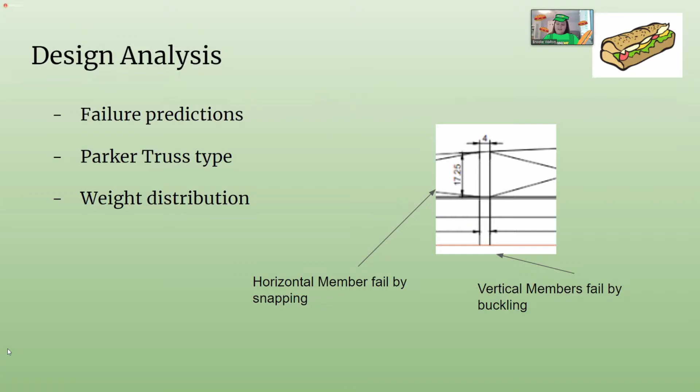After those calculations were completed, we found that the downwards forces were about 2.6 times larger than the upwards forces, which unfortunately means the bridge would fail under these given conditions. Looking back, we forgot to consider the reactionary forces caused by the ground itself, which would have had a significant impact on the upwards forces, helping it stand. That's something we would have changed if we got to do this again.

As Shannon already mentioned, this was selected to be a Parker truss type bridge that would span 600 meters across the Ottawa River. A little bit about the dimensions: we were required to have a clearance of 6.7 meters from the water level to the underside of the bridge for boats to pass underneath. With 600 meters as our given length, we decided to subdivide the bridge into 3 sections, with a primary column about 200 meters into the bridge and then 200 meters in from there.

At those points in the Ottawa River, the average depth of the water is about 38 feet, approximately 11.6 meters. As a team, we decided to round up to 19 meters for an overall column height from the ground in the water to the underside of the bridge, giving an overall clearance of about 7.4 meters from the water level to the base of the bridge, providing extra leeway in terms of the size of ships that could pass underneath.

Now, a little bit about the width: it's about 18 meters, with 2 traffic lanes and 2 pedestrian/cycling lanes on either side of the bridge. The bridge is made up of mostly steel in order to make it more affordable, sustainable, and weather resistant.

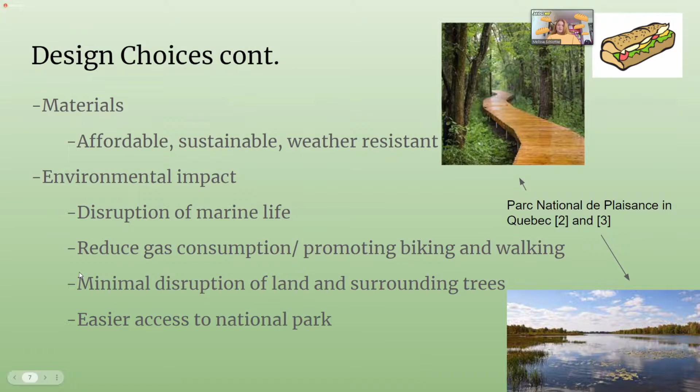The free flow speed was determined based on various adjustment factors influenced by the design of the bridge, such as lane width, lateral clearance, median type, and access points. After finding a free flow speed of 87 kilometers per hour, the heavy vehicles factor had to be calculated before we found the peak capacity of the roadway.

Based on the information given about truck percentages, we found the factor to be 0.94, which determined a peak capacity of 2,571 passenger cars per hour per direction.

These values were determined with a density of roughly 30 passenger cars per kilometer per lane, which was cross-referenced with the level of service criteria to find a level of E for the roadway. It's not great, but since the roadway is not heavily used, being in a very rural area, the design should be sufficient enough. We would like to open up the floor for any questions.

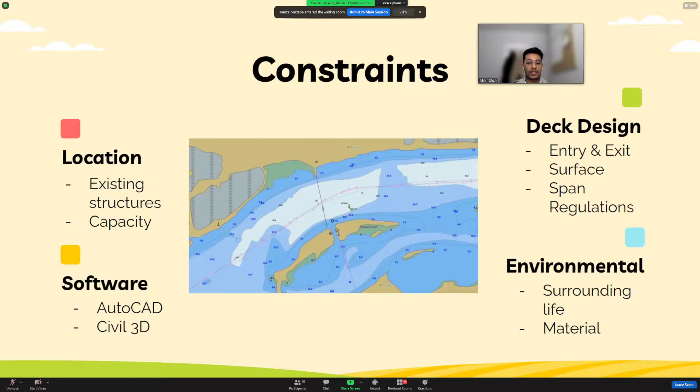Before hopping on AutoCAD, we collectively decided a few key measurements. As mentioned, there was a constraint on the height of the bridge. The height of the bridge itself is 6.7 meters above the water, allowing for clearance of boat traffic. There won't be any major supports in the middle of the span of the bridge, ensuring boat traffic is not stalled. Next, the distance between the two docks was 500 meters, but we decided to add an extra 20 meters on the Thurso side, as that would ensure the ramp begins before the dock.

This decision was primarily made due to flooding concerns present in the area. By pushing the ramp back 20 meters, it allows for support to be on land instead of in the water, to ensure no water is displaced towards the residential side. There will be single lanes going in each direction, each with a width of 3.75 meters, as that is sufficient to accommodate both regular vehicles and heavy ones as well.

We used arches spanning from either side of the bridge towards the middle, and to increase the aesthetics of the bridge itself, we included angled members going to the top of each arch. To be economical in our design, we didn't add anything super funky, so it's quite simple.

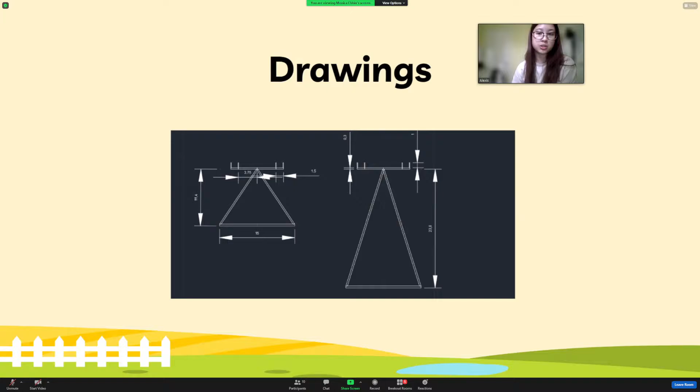As we mentioned before, one support is larger than the other. We have the drawings here. The left side shows the support on the Thurso side and the right side is on the opposite side.

To justify our specific design, we wanted to talk you through a few different parameters that we used. So the first one being the span height. Like the rest of my team mentioned, we had a specific constraint, so we decided to have a span height of 6.7 meters.

Next, we want to talk about the length of the bridge. So we did surpass the 500 meters between the two docks, but this was entirely due to flooding. We wanted to push back the entrance ramp on the residential side so we wouldn't have to worry about flooding as much as we would if we displaced water.

Next, we want to talk about our incline and decline ramps. So we decided to have an angle of 15 degrees, which correlated to about a 25-meter long ramp. This was both because we felt safe doing this and we didn't want to create anything insanely steep, which would lead to flooding concerns again and would cause problems in slippery weather and in the months of snowfall.

Furthermore, to be kind to the natural habitats in the surrounding areas, we plan to use modular construction. This will allow for the bridge to be built in a remote factory away from the small town and the ferry lane, so it can be transported and put together on site. This will minimize job site waste and reduce the negative impacts a construction site would have on the natural habitats.

Also, we recognize that the bridge is built to connect a small town to a natural island. Therefore, we will include a shared pedestrian and bicycle lane, which will be divided by a concrete railing for both the safety of the drivers and the pedestrians.

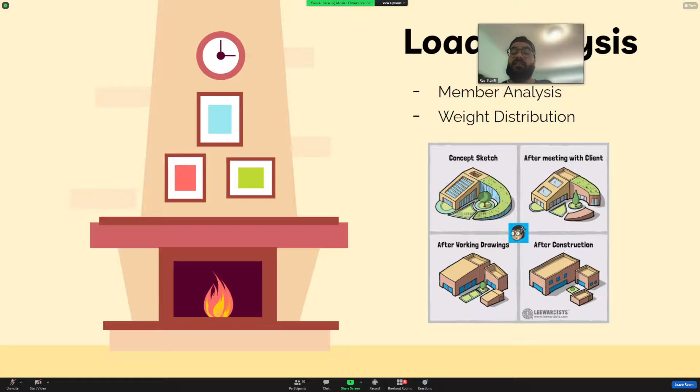Since we already discussed sustainability in the previous slides, I'll move on to our design. We found our free flow speed to be 90 kilometers an hour with a level of service at level A. This means we were able to create a speed limit of 100 kilometers an hour on the span of the bridge, creating an efficient connection between the two pieces of land.

The flow rate used was found from Google Traffic Service, as linked in our challenge guide. We used that number to find the PCU per hour and then adjusted it to the 7% heavy vehicle load, ending up with a final adjusted flow rate of 45 PCU per hour. We also discussed the topography in the area, as well as used different supports to accommodate for the area.

Overall, we really enjoyed working on this project, and we wanted to thank you for your time and for listening.

Well, he said it for you guys - time is up. Now we need to move on to James Bond License to Glue. I really like that name, to be fair. Okay, that should be the third presentation, right here. But we really do hope you enjoyed that. Now we're moving on - this should be it, yeah, it's pretty cool, just the 3D, they're right, the 3D is lagging a bit. All right, wish them luck.

I think we can let them in. Yeah, I'll let them in. Yeah, Ermin's gonna send them.

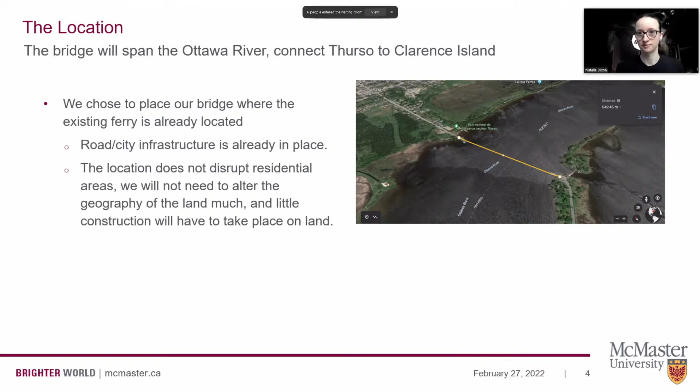For our design, after we measured the distance between the river area, we made a bridge that's about 550 meters long, and we also have a top platform at the bridge that's about 9 meters high, and the flat surface is about 100 meters long. This allows boats to go under the bridge, and about every 50 meters we have a pillar, constructed with concrete and steel I-beams, that supports the weight of the bridge, and on the surface is a 9.2 meter wide road. We also added a pedestrian road on the left, allowing bikes and pedestrians to cross the bridge as well, and we added concrete shoulders to protect pedestrians and create distance between the pedestrians and the vehicles.

And here's a top view. We can see the pedestrian lane on the left and then the vehicle lane on the right, and just the overall layout.

So this is our Civil 3D model. The first thing you might notice is we are missing the concrete supports under the bridge, so it is kind of floating. This was just due to us struggling using the software and running out of time. So it's just a bit of a long road, but you can see in the picture our pedestrian walkway, which could also be used as a bike lane, and the 2 lanes for traffic, as well as the shoulders on either side. That big block you see there would be a fence. Based on our limited knowledge of the software we couldn't really make it pretty, but in real life we would hope that might be something a little more decorative, as it's more for protecting people as opposed to actual cars.

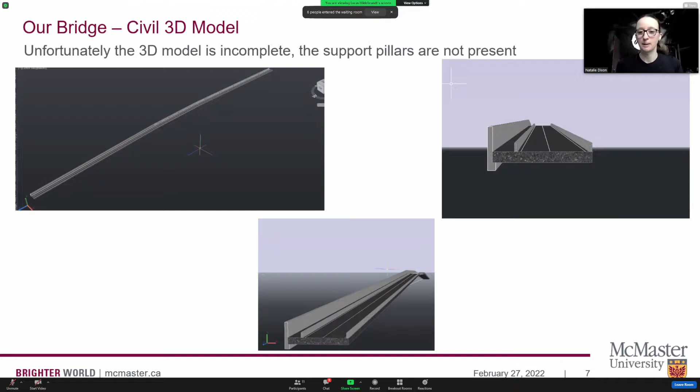So some features of our design: it is trapezoid shaped as shown in the previous image, and it's steel girders with a concrete deck on top. So we've got a slope up to the middle span.

The middle span is our full height at 8 meters from the water level to the bottom, to allow boats to easily pass through. We decided to slope it up so that way we could use less material in the supports, as they wouldn't need to be as tall.

This also makes it easier for cars to travel. Each support, though not shown, would be 50 meters from each other, in order to keep a relatively low span on each one and lower the amount of force pushing down.

So the total bridge span comes out to be 550 meters, and it's directly perpendicular to the riverbank, which would be the shortest distance across the river.

We made sure the height is high enough in the center of the bridge, so that even if there is a little bit of flooding, the boats can still pass through safely. We got these heights by looking at other bridges throughout the river and making sure we have enough distance for the boats.

Basically each span on the bridge will consist of 4 girders side by side. So here's a simple load analysis.

We calculated this by looking at some of the dead loads and estimating a number for the live loads as well. As we can see in the bending moment diagram, our highest bending moment would be in the middle of the span, and that would be our most likely failure point.

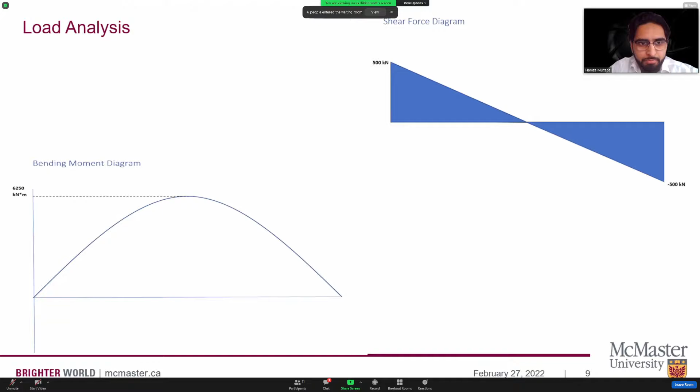Looking at some of the traffic around the bridge area, there's a causeway that leads to Clarence Island. And in Thurso, it's just like a residential road that leads from the ferry to the actual township, with houses lining the banks.

We estimated the speed limits on both of those were around 40 to 50, with the causeway being a little bit lower just due to the danger of driving right beside the water. With this in mind, we designed the bridge to have a speed limit around 50 kilometers as well, just to not create a bottleneck in Thurso or on the causeway.

With that in mind, we were able to reduce the lane width to only 3 meters. We did include a small right shoulder just for safety reasons and pulling over. For the number of lanes, we only have one lane each way.

For the median, we do have it undivided, just in case of an emergency and that part of the bridge needs to be closed off, police cars can still go around any sort of accident that happened. With this, we believe that it was more than enough.

We had a free flow speed of 61.3 kilometers per hour and a base capacity of around 1,500 cars per hour, or around 750 cars per lane. Again, because it's such a rural area, we believe that this actually helps in the future for any building-up needs that either township might have.

Thank you for listening. Thank you.

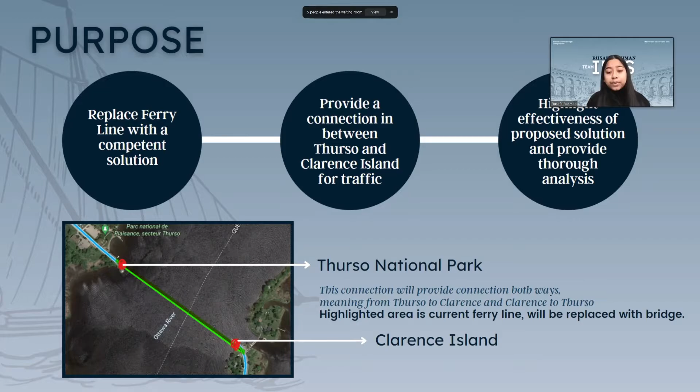With that, I'd like my teammate Sahib to take over and introduce our design.

On this slide, we can see the top view and the front view of the bridge. The total deck length is about 585 meters. Since beam bridges work more efficiently within 76 meters of span length, we chose a span length of 73.125 meters, giving us 7 separate pillars.

We have a separate drawing for the side details of pillars on the next slide. We wanted to highlight how we accounted for the difference in water depth by making the center pillars deeper. We also added an additional 8 meters to every pillar to account for the heights of the boats passing under the bridge, which will also protect the bridge from flooding events.

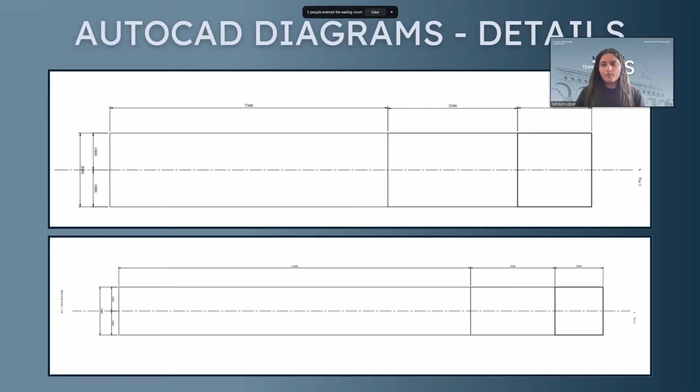Moving on to the next slide, we can see the design from the side. We chose to keep 2 lanes for each direction and slightly raised the sidewalk for pedestrian access. Concrete barriers have been incorporated on both sides, and the total width of the bridge is about 22.8 meters.

All of these measurements were derived through thorough traffic analysis. Our objective was to not reduce the base free flow speed at all, and we succeeded in 2 out of 3 cases. We kept each lane width about 3.7 meters, keeping the lane width factor at 0. The inclusion of concrete barriers on the lanes and medians made the right shoulder clearance about 2 meters, keeping that factor at 0 as well.

One thing we couldn't practically impose was more than 2 lanes per direction. This reduced the speed by about 7.3 kilometers per hour, but Thurso is a small city, so even with 4 lanes per side, it would not aid traffic flow. Now I'll pass on to Sharanpreet.

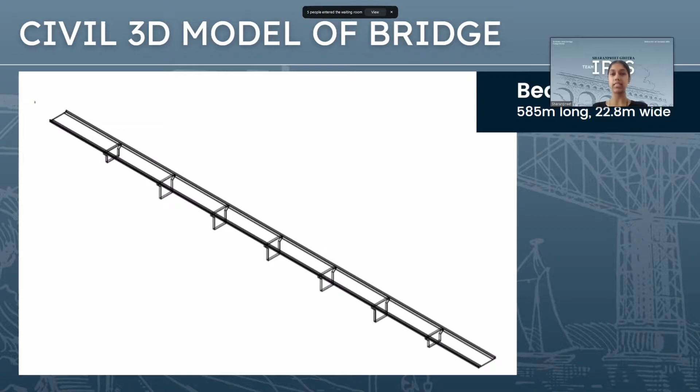The Civil 3D model of our beam bridge shows the key features we incorporated to best fit the problem statement. To justify these dimensions and explore what influenced our design, we did extensive research. Before constructing the drawings, the team spent much time researching and analyzing the problem statement. We researched different types of bridges and chose to design a beam bridge because it was affordable, could be built quickly, and could easily organize ferry traffic.

Looking at the river where the design was being built, we decided that a bridge with a short span of approximately 73 meters would be most affordable for a shallow river. Comparing that to the desired location of the bridge, we decided on 7 supports equally spaced from each other. We also varied the heights of the supports depending on water depth, paying close attention to the height required for ferry traffic.

Another key design feature was the desired free flow speed. We chose a level of service of D to make the freeway safer while ensuring the speed was not reduced by a huge amount. There was similar reasoning and justification for many of the other measurements.

Now on to Izza. To determine the weak points of the bridge and potential points of failure, our team conducted a load analysis. First we took a point load and moved it across the bridge, using that to find our shear and moment diagram. Then we used data from the average traffic load as a live load to estimate our max shear and max moment.

Through our findings, we found that the most vulnerable point of the bridge was in the middle. This is useful for the future, if we want to add any reinforcements or do inspections, we know to focus in the middle. Now I'll hand it over to Benin.

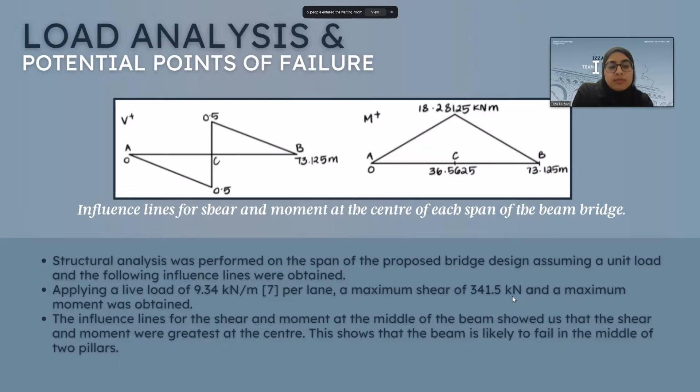As civil engineers, our choices largely impact the environment since we are directly working with it. That being said, we all value sustainability greatly. This core value assisted us in realizing the detrimental effects of ferries on the environment, as they account for roughly 23% of sulfur oxide emissions, 13% of hydrocarbon emissions, and 8% of nitrogen oxide emissions.

When it comes to sustainability, there are 3 main priorities: being economical, having minimal impact on the environment, and having minimal social impact. Our bridge aligns with these values perfectly, while ferries do not, making it a perfect substitution if need be.

Since the bridge uses reinforced concrete, it has steel in it, and steel meets 3 priorities because it's economical in the sense that it's lightweight and cost efficient. It is environmental because steel is the most recycled material, even more than plastic, and it has minimal social impact because it can be strengthened and adapted.

That means it can last for future generations, and that means less renovating, which will impact our environment. So through multiple justifications and reasonings, we can confidently say that the bridge designed by our team is the best replacement for the existing ferry system.

We took into consideration the environment we built in, and that's how we decided the size and type of the bridge. We also kept in mind traffic and pedestrian load, and we used the average live load data to determine our potential points of failure. On top of that, we also factored in the environment. We tried to reduce the materials we used and use sustainable options with the goal of minimizing emissions. Because of this, we believe that our design perfectly fits the situation we were given.

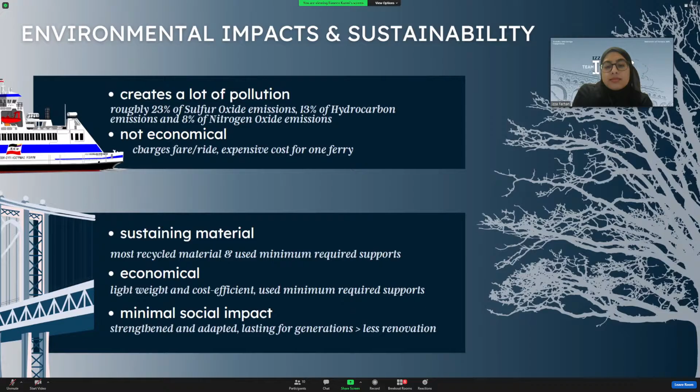And we're open to any questions now. Thank you, team.

I'm glad to tell you that your presentation is much better than your report. A lot of information I got from the presentation that I couldn't get from the report, or it was not clear in the report. So I'd like to clarify some of these. The report didn't give us a good first impression, but the presentation is the other way around. I like the presentation a lot, and I find a lot of confidence when you're talking about that. So I just want to make sure that I clarify some points.

One of them: in the report, you said the bridge span cannot be more than 76. In the presentation, you say this is the most optimal. Those are two different contradicting statements. So can you explain why you selected 73, and what you mean by 76 being the optimal?

Yeah, I can take that question. As you can see on our sources, one source told us that the most optimal span in between the beams is going to be 76.2. That was in feet, we just had to convert it into meters, and that was the most optimal support. If we went more than that, the bridge would be weakened by a lot. So we took our bridge, which was 585 meters, and divided it by a number that would give us something less than 76.2 meters.

Main section or the deck of the bridge - if there was cracking or anything along the deck or just under the deck, the bridge could collapse or crack enough to fail. Another point is in the arc, so we could have any cracking on the outside or inside, and that would cause the bridge to fail because the weight would not be distributed properly.

A few assumptions were made when calculating information for the traffic analysis. We used information from the Alexandria Bridge that crosses the Ottawa River from Ottawa near the Parliament buildings to Gatineau, where daily vehicle crossing data was about 18,000 vehicles a day. Since Ottawa and Gatineau have a greater population than Thurso and Clarence Rockland, we assumed the volume of vehicles per day crossing this new bridge would be half of that crossing the Alexandria Bridge. Then with a conversion factor of 0.15 from daily to hourly volume, the number of vehicles crossing this new bridge was assumed to be 1,350 vehicles per hour.

With this information and a calculated heavy vehicle adjustment factor of 0.97, we calculated the flow rate for our bridge would be 1,390.75 passenger cars per hour per lane. We kept the free flow speed at the base speed of 90 kilometers an hour, as the bridge has one lane of traffic in each direction, each with a width of 3.6 meters and a right shoulder lateral clearance of 1.8 meters. Finally, the level of service for the bridge was C.

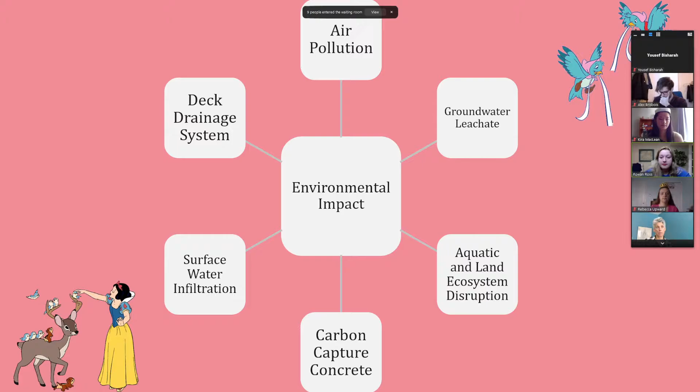And thank you for listening and have a magical day.

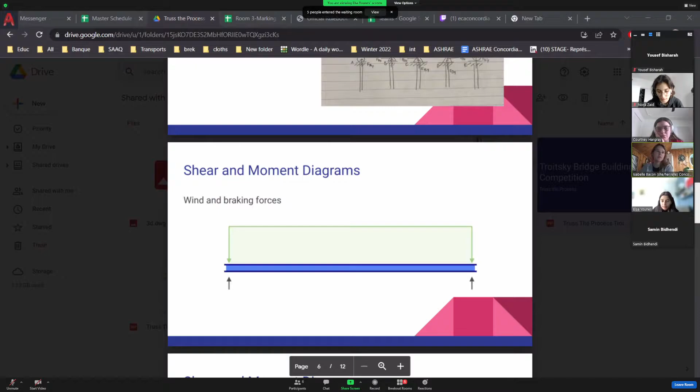You seem very critical of it. At least they showed more than one point of failure, that's good. All right, this gives it... okay, this gives it 1 more minute. And they should be here at one point.

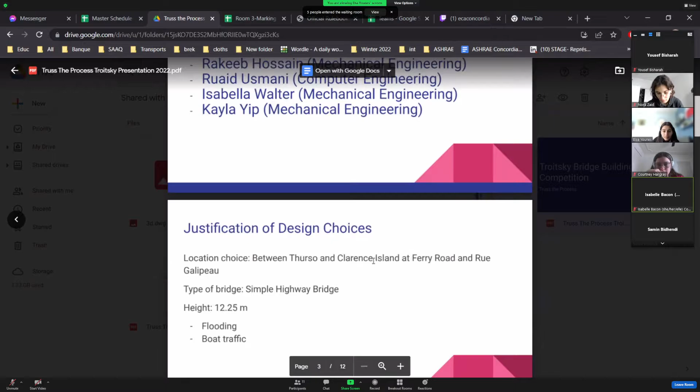Hello. Oh, we got someone. Hello. What time are they supposed to start? They're supposed to start at 11:15. Okay, but I guess wait, they have 7 minutes to present.

Okay, so should you be able to start whenever you're ready? I don't know, Isabel, are you ready? Okay, this is gonna be Truss the Process. I like that name though, it's kind of cheesy. We can give it a minute.

Yeah, hold on, she's not there. Okay. We are here. Hi, there you go. Oh my god, I was looking at chat, it's all just emojis and all that. I mean, for a quick minute I was like, wait, is the chat only on emote-only mode?

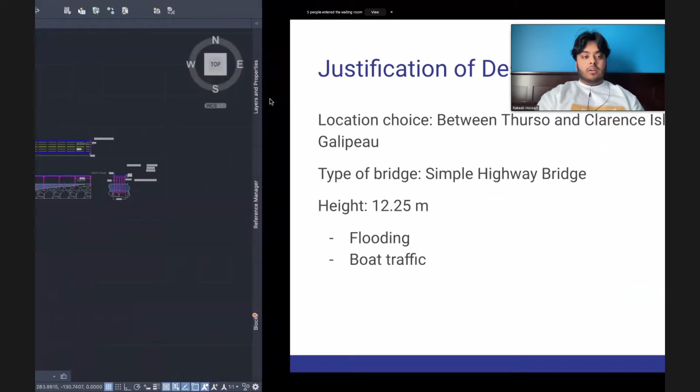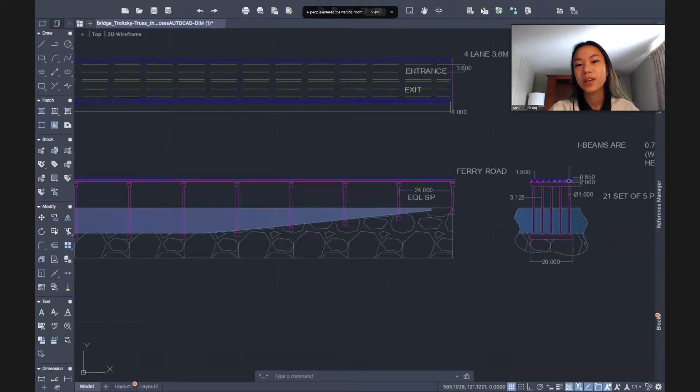Hi, so we decided to design a simple highway bridge, also known as a beam bridge. It is composed of 21 groups of pillars. In each group, there are 5 pillars equally spaced at a distance of 3.125 meters apart. The pillars are 1 meter in diameter.

They sit on top of a shallow foundation that is a 2 by 2 meter prism, 20 meters wide. On top, there is also a pile cap that is chamfered for aerodynamics, also a 2 by 2 prism that is 20 meters wide. From the shallow foundation to the pile cap, it is all made out of reinforced concrete.

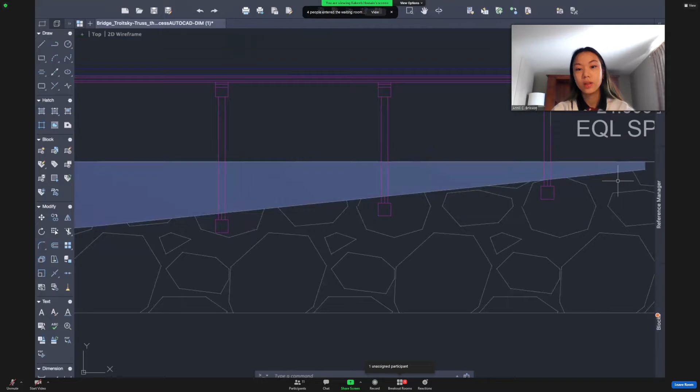As you can see in the front view of the bridge, the pillar groups are not all the same length. This is because for our foundation, we decided to make the shallow foundation 3 meters deep into the soil, and have the pillar also inside the soil for stability.

Moving on top of the pile cap, we have 8 pre-stressed concrete girders evenly spaced out, which sit on bearings. This helps because when there's traffic moving or wind hitting the bridge, you need some flexibility so that nothing cracks. Above that, we have a 0.3 meter thick slab, also made of reinforced concrete.

On both sides, we have 0.5 meter wide parapets, and we also have sidewalks which are 1.5 meters wide. Sandwiched between those two, we have our inclined wearing surface, inclined at 1%. This is done so that when it rains, the water can move downwards and go through the gutters, which are placed next to the sidewalks.

On this wearing surface, we have 4 lanes, 2 by 2 in each direction, measuring 3.6 meters each. We also have a median of 0.4 meters in the center and shoulders of 0.6 meters on the sides for any safety precautions.

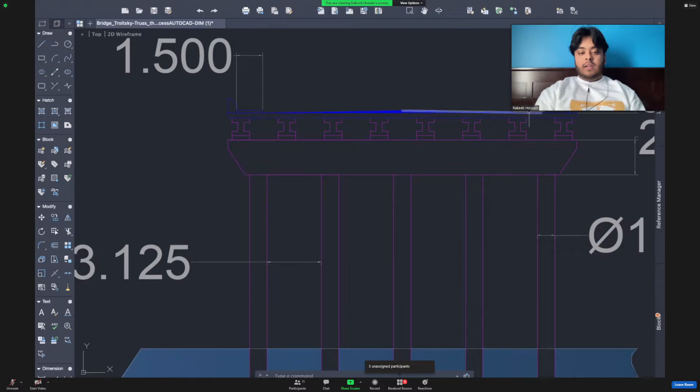So now our environmental concerns. One of the concerns we've had was regarding excavation. Our worry was that we might disturb wildlife and aquatic ecosystems in the surrounding areas, due to the digging needed to put the foundation underground.

Another concern we have, which is actually a positive one, is the sidewalks. Because we have sidewalks on our bridge, people are able to walk across it or even take their bicycles, which decreases pollution and carbon emissions. For financial constraints, because our bridge is mostly made from reinforced concrete and pre-stressed concrete, it's cheaper than other materials you may find on bridges. So that's a positive for our bridge.

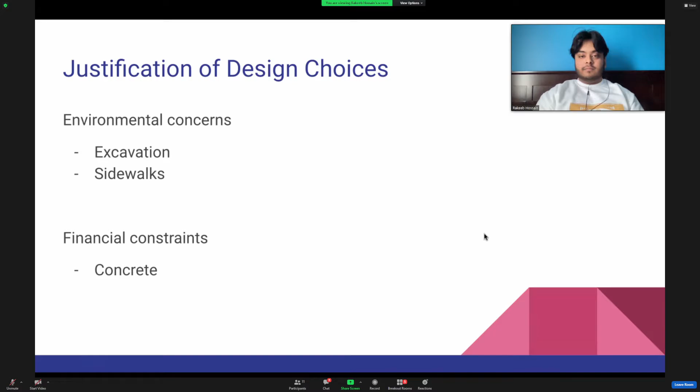The columns each have a dead load of 18.84 kilonewtons, and it has also been calculated that 4,230 kilonewtons is the dead load of the deck. The girders are pre-stressed, which makes them stronger. There are no cross beams on the girders since the columns are not as spaced out, thus they do not need the extra support.

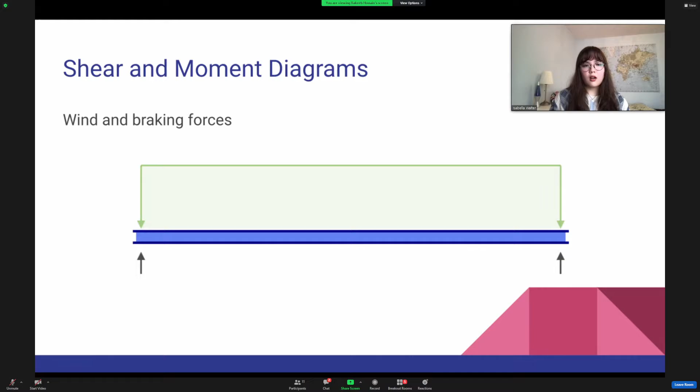So if we look at our free body diagram, most of the supports are pins, so those account for the wind load, braking forces, and other frictional forces. There is an evenly distributed load, and the columns account to put the bridge in equilibrium.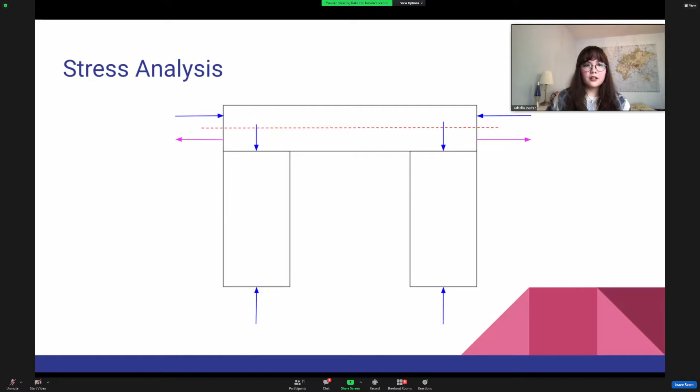And if we look at our points of failure, the potential points of failure are at the supports because of shear failure, between the supports because of flexural failure, and then at the middle of the bridge and between the supports because of the high moment demonstrated in the diagrams.

We got a level of service of B because we had near perfect free flow, and we set a free flow of 90 kilometers per hour, but after our calculations we got 80 kilometers per hour. We had 2 lanes and a small 0.6 meter clearance. Thus we got a level of service of B.

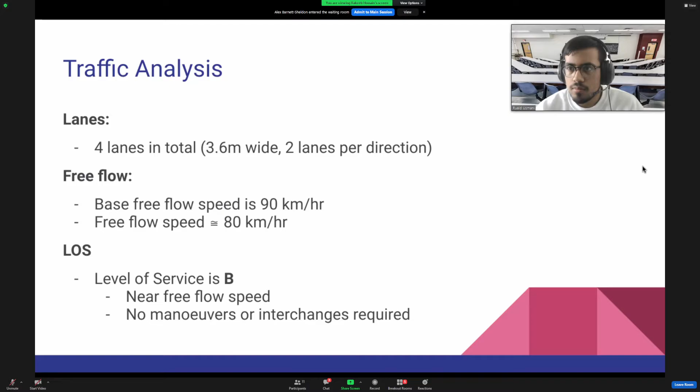Okay great, judges, I'll take you to the judging room. Can we ask some questions first? Oh yes, yes, you guys can ask some questions. You guys said that you are first year, right? Yeah, we are first year mechanical and computer engineering students.

Just trying to leave, can I stop sharing my screen? Yeah. All right.

So you got 21 sets of piers, a group of reinforced concrete pillars. So how many in total are you planning on putting in the river? So it's 21, and then there's 5 at a time, so that would make a total of 105 pillars. Have you ever seen a bridge with that many pillars in the river? No, we were thinking about putting 3, but because our bridge is a bit wider and has 2 lanes going on each side, we thought the more support it has, the better it would be.

My question wasn't more on the 3 versus 5, but the number of them across the span. Yeah, it does sound like a lot, yeah. I don't really have any other question.

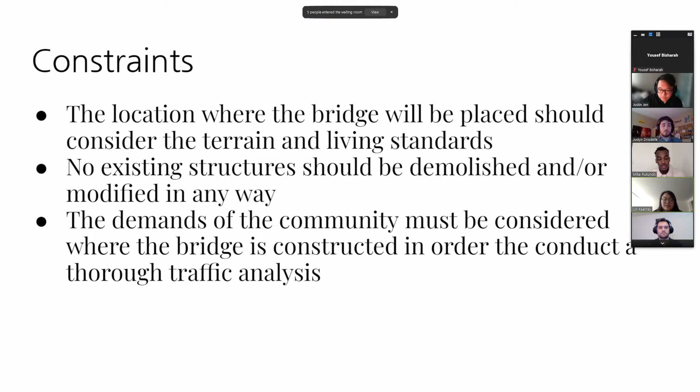More constraints consist of making the bridge high enough to allow boats with an average height between 2 to 2.6 meters to pass under, also taking into account the 487-meter river width and accommodating for floods, which can add up to an extra meter in water height.

From the traffic analysis, we assumed one lane of traffic in each direction, and the bridge should support 4,400 tons of weight.

The main stakeholders we will be addressing today: first, the residents of Thurso, Quebec, and Rockland, Ontario, the nearest city on the other side of the bridge. They are the main stakeholders since the bridge will be in their cities and serve as their main form of transportation across the river.

Of course, the city governments of each city, Thurso and Rockland respectively, will have great stake in the bridge, as if something fails or succeeds, it's all about the city fixing that and taking responsibility.

The surrounding environment, such as birds, beavers, and maybe bears, also has a major stake, since there's a national park on the Thurso side of the bridge. We do not want to disrupt anything going on in the national park. We want to keep everything open, avoid demolishing existing structures, and avoid excessive noise. So the main stakeholders include all of the surrounding environment.

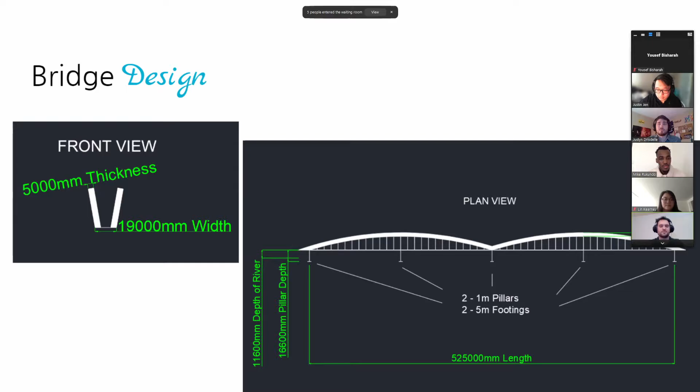If you look at the top view, you can see we have a 2% slope from the crown of the road towards the drains. This is because the river is prone to a lot of flooding, so we had to ensure our bridge had a lot of drainage. The bridge length is longer than the road connections to prevent the road from flooding as well. Lastly, the sidewalks are 4,500 millimeters, or 4.5 meters, to allow for pedestrian use and accessibility.

As you can see below, there are concrete pillars on footings, and these footings are parallel to the flow of water to reduce impact on drag and align with the direction of flow.

Now let's briefly talk about the load analysis of the bridge. There are two main factors we must consider: dead loads and live loads. The dead load includes everything the bridge will hold before cars travel on it, including the bituminous wearing surface, steel girders, and concrete medians. With these three components considered, the distributed dead load of the bridge will be around 64 kilonewtons per meter.

Now let's talk about live loading. Traffic loading was based on the Canadian Highway Bridge Design Code and CL-625 Ontario lane loading. This assumes a distributed load of 9 kilonewtons per meter along the span and a point load of 625 kilonewtons corresponding to the axles of a truck.

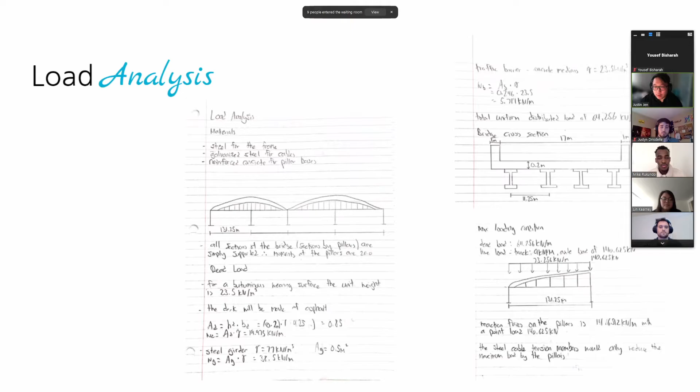If we add all those loads together and divide by the 5 supporting pillars, we find the reaction force on each pillar is around 141 kilonewtons per meter, with a point load from the 625 kilonewton truck. There are 4 possible points of failure, located at the midpoint between each pillar, where the moment of force would be greatest. When a direct point load is applied at one of the midpoints, the bridge will fail from displacement there.

There are many environmental hazards to consider. The main one is ensuring the preservation of the Parc National de Plaisance, or Plaisance National Park, on the Thurso side. We want to ensure the park remains open, as there are surrounding trails residents like to walk or bike on, as well as a marshland used for swimming, kayaking, and canoeing, which also hosts many forms of wildlife.

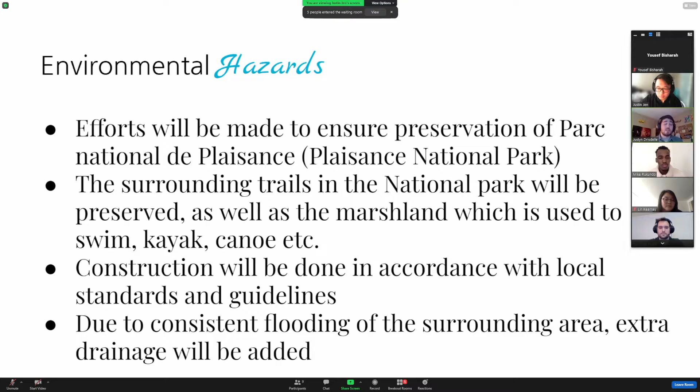Construction will be done in accordance with local standards and guidelines, meaning we cannot demolish any existing structures, so we have to work around that. Due to consistent flooding of the surrounding area, extra drainage will be added to ensure the bridge can remain open year-round. Thank you very much. We will now be answering questions.

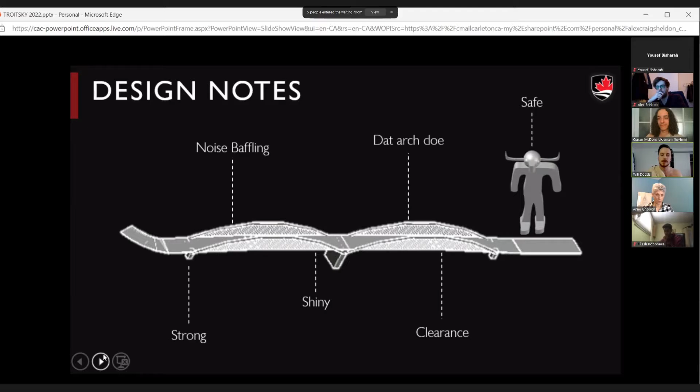The points of failure are that the cables and connections of the arches might fail due to overloading on the deck. Arches have to have a great enough radius to be stable, which could affect the strength of the connections. Our bridge was designed for a specific loading, so if a greater loading is placed on the deck, there could be a risk of breaking the cables. There could also be a failure at the supports since there is a heavy load mostly on the midspan of the bridge, roughly 7,000 kilonewtons, as well as roughly 4,000 kilonewtons at the end supports.

Moving on to how this project might impact the surrounding ecology and how we aim to minimize that. Firstly, the elimination of the ferry is by nature a significant improvement. Due to the inefficiency of water-based travel, ferry crossings produce 20 to 100 times the particulate matter and 1,000 times the hydrocarbons on a per person mile basis compared to personal gas burning vehicles. These values only consider travel time alone; factoring in lengthy boarding times and any maintenance and testing of the ferries, this effect inflates further.

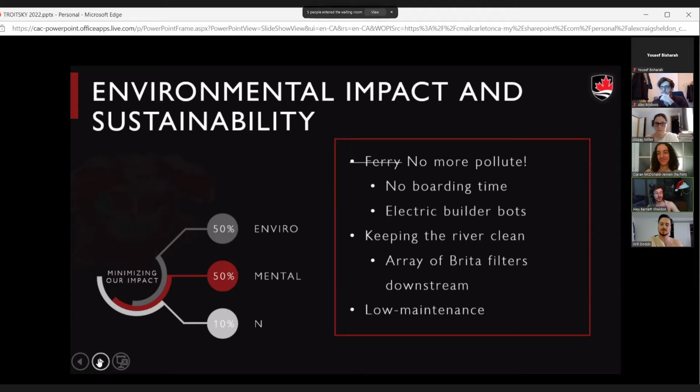For traffic analysis, we observed the Quebec traffic maps to determine whether there was a lot of traffic in the area, and it turned out there wasn't—it was all green. Therefore, we could assume a level of service A, the greatest criteria, meaning the least amount of traffic. With all the resources and tables given, we determined a free flow speed of 96.1 kilometers an hour. The location is in proximity to Ottawa, so there could always be a potential surge of traffic, large trucks, or large gatherings.

For community impacts, the bridge gives year-round access, unlike a ferry that can only be used during warmer months. With the sidewalk and bike lanes, it allows for pedestrian crossing, which is important because there is a national park on one of the ends of the bridge. The bridge is also tall enough to allow marine traffic to proceed underneath, and people will generally be happier.

Lastly, activism is on the rise, and unfortunately this includes activism for imagined or otherwise whiny causes, as we saw recently. For this reason, we saw fit to consider noise pollution and mitigation thereof when designing our bridge.

Unfortunately, due to time constraints, we were unable to see this goal through to its fullest potential. The original intention was to integrate baffling structures on the interfacing surfaces to diffuse any excessive sound sourced from the bridge. That being said, concave curved shapes are known to redirect and amplify sound back towards its source, hence why domes have historically been used for theaters before the advent of microphones and speakers.

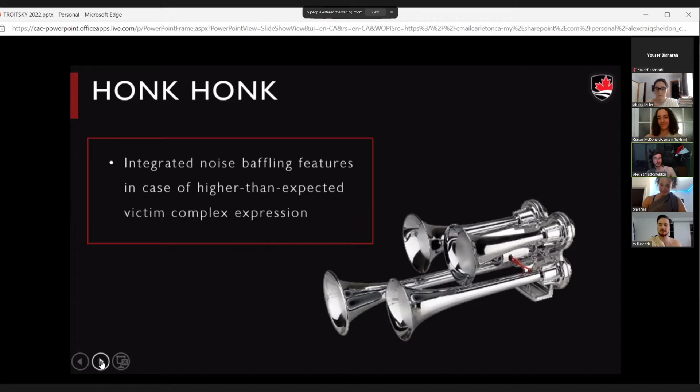Thank you very much, that is our presentation. We are the gods of the bridge.

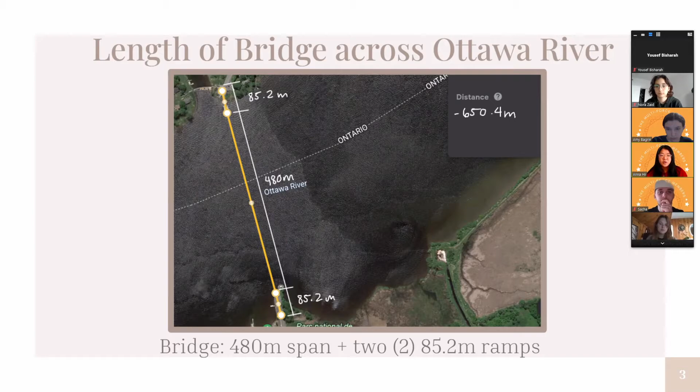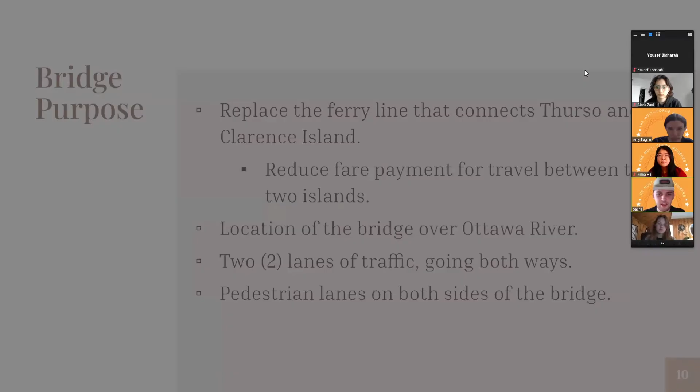Now for the purpose of the bridge: we're building a bridge that will connect the communities of Clarence and Thurso over the Ottawa River. Now for the justification of our design: to connect these communities, we will use a harp system cable bridge. This type of bridge offers high stiffness, safe material usage, a high amount of redundancy, and serves a nice aesthetic purpose.

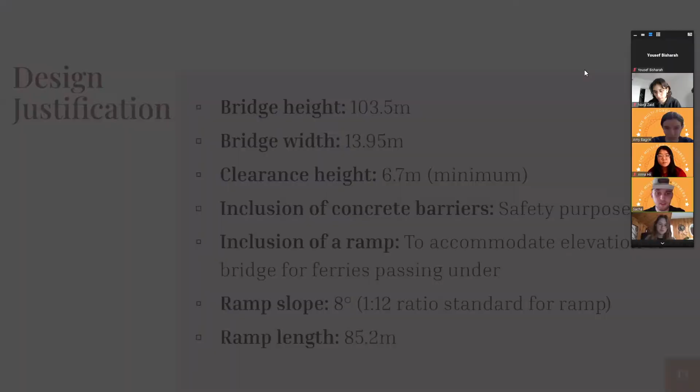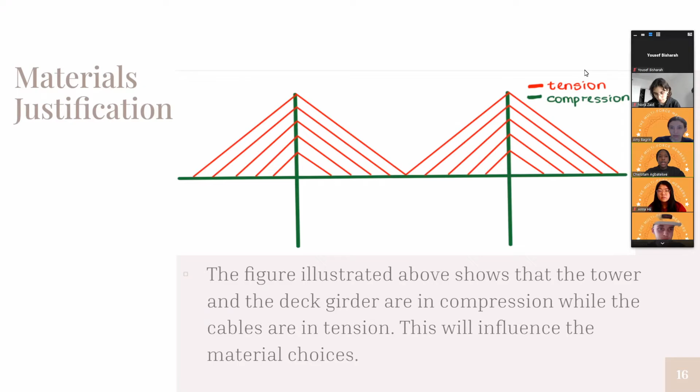So in terms of our material justification, we came up with this diagram illustrating the forces on the bridge. From what you can see, the cables are going to be in tension while the towers and the deck are going to be in compression. So these forces influence our material choices.

For our tower and box girder, we decided to make them out of pre-stressed concrete because they do very well in compression and have a minimum strength of at least 55 megapascals. Also in terms of financial consideration, they're very economical, and also very durable.

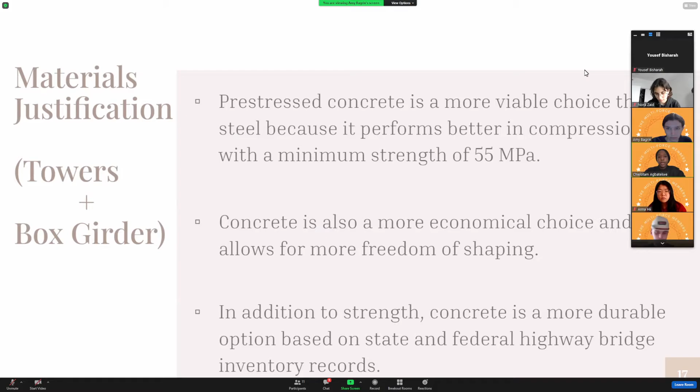Our stay cables are going to be fabricated from high strength steel, and each strand will have a strength of 1,860 megapascals. We're going to interweave 9 of them together for increased strength.

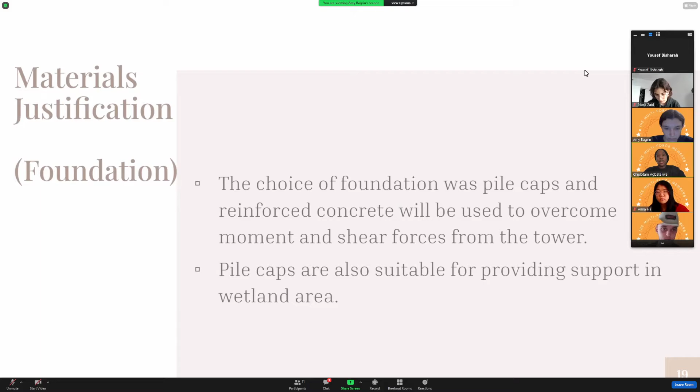Finally, for the foundation, we chose to use pile caps, made from reinforced concrete, which will be able to overcome both moment and shear forces from the tower. They're also suitable environmentally because the surrounding areas are going to be wetland areas, and pile caps will be strong enough to withstand the forces around there.

Next, for the load analysis, we accounted for 2 types of loads, live loads and dead loads. For the live load, we took it from the US Department of Transportation. It's a constant value of 9.34 kilonewtons per meter, distributed uniformly.

For the dead loads, we accounted for the different components of the bridge, such as the concrete barrier, the asphalt, the concrete post-tension deck. We did this by finding the volume per meter and multiplying that by the density, which is different depending on the material, as well as the gravitational acceleration.

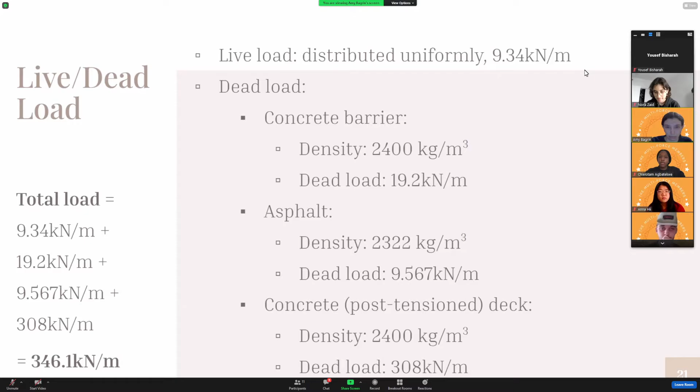We summed all of these loads together to get a total load of 346.1 kilonewtons per meter, and we use this to inform our potential points of failure. We found that the point of maximum moment occurs midway between each pair of cables.

For the shear and bending moment diagrams, we assume that the ramps are pin connected to the main span of the deck, and that the columns on either side were pin connected to the deck as well. For the tributary areas, to assign the loads to each cable, half of the deck went to the left tower and half of the deck went to the right tower.

You'll find that the elements of our bridge are repeated, such as the right triangles, so we only needed to model one part of the bridge in order to find the points of failure. As mentioned before, all loads were evenly distributed.

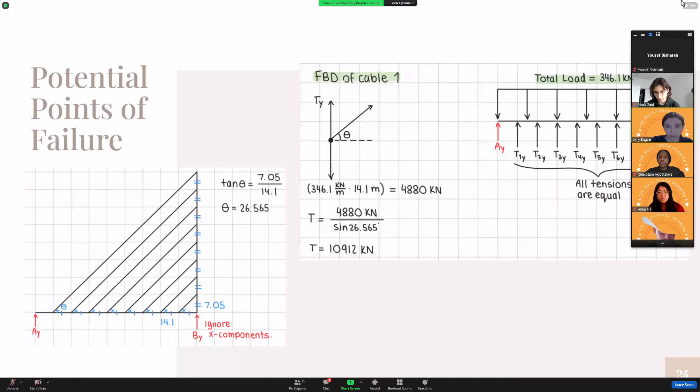As you can see here, we have some different FBDs to model the different forces: the downwards distributed load, the upwards tension forces, as well as the reactions. Note that the cables meet the deck at the same angle theta, so that made all of these tension forces the same. We only took into account the Y components for the purposes of the shear force and bending moment diagrams.

You'll find that the maximum shear force occurs where the cable meets the deck, meaning that the maximum bending moment will occur between each pair of cables, at a value of 8,600 kilonewton meters.

Now for the environmental impact and sustainability. Here on this map, I noted some points of interest. The red dots indicate a man-made bridge that floods quite often. The green and blue dots are susceptible to groundwater pollution, as there are two parks.

One of them is a national park on the north, and the bottom is a fishing spot that is quite popular with the locals. Finally, in a more global sense, we will be using a concrete of the style of EcoPact as a way to reduce CO2 emissions.

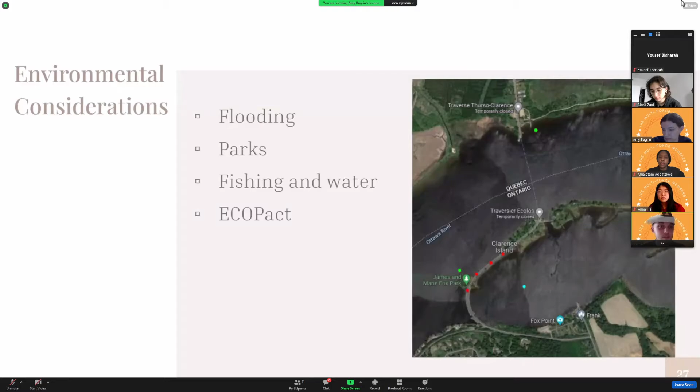Now for the traffic analysis.

Using the base free flow speed of 90 kilometers per hour, we adjusted the speed based on the lane width, which is 3 meters, the right shoulder lateral clearance, which is 1.2 meters, which is also a bike lane, and the number of lanes, which is 2, to have a total free flow speed of 70 kilometers per hour.

We determined the speed limit on the bridge, which is 50 kilometers per hour, based on the speed limit on the surrounding and connecting roads, which is 30 kilometers per hour and 50 kilometers per hour.

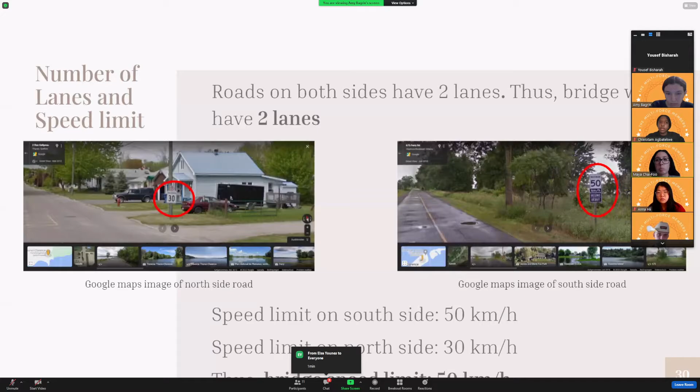Using Toronto's transportation guidance rules, based on a curb shoulder lane, the minimum bridge lane width is 3 meters, so we use that in our lane width.

And we determined level of service to be level B because the surrounding populations of the towns are quite small, and we would assume there's not going to be a lot of traffic buildup on the bridge. So that's why we assume level B.

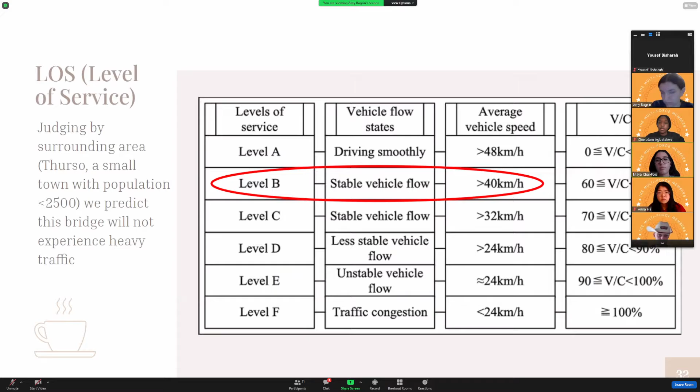And that's all for our presentation. If you have any questions, we would like to open the floor for them. Judges, you can ask your questions now.

Great job, guys. What's your background? Are you guys all in civil? Yes, all of us, we're all in civil. The girls were all in second year civil, and Sasha is a first year civil.

Okay, cool. Just curious, did you guys consider doing 2 lanes in each direction? And if you did, why did you stick with 1 lane?

Basically, we know the traffic in that area is not a lot because it's a pretty rural area, coming from national parks, so we didn't think we needed 2 lanes. Also, 2 lanes would greatly increase the width of the bridge, meaning greatly increasing the materials used to build it, making it heavier and harder to support. So that's why we stuck with 1 lane.

Additionally, the road that is already there is only 1 lane going either direction.

Do you guys have any other questions? I'm good, it was a good presentation, guys, good job. Okay, thank you, we appreciate that. We'll be back with some feedback.

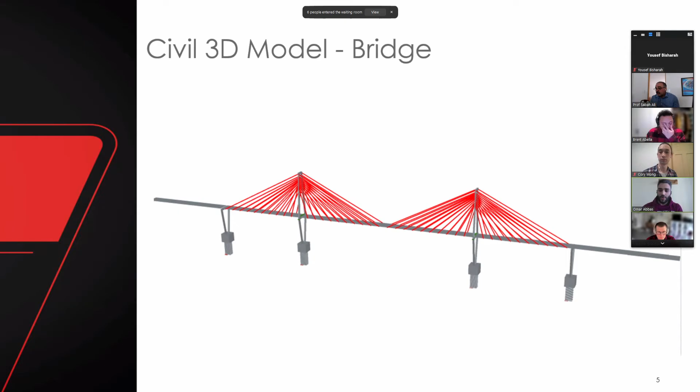Thank you, Omar. So as Omar said, we used symmetry to our advantage.

It gives a very aesthetic appeal to the bridge itself. The superstructure of the bridge is composed of 2 piers, and the substructure is composed of 2 pile caps with steel piles underneath them. The vertical line represents the water elevation, and we allowed for 25-meter vertical clearance to allow the passage of a typical ferry to go through underneath the bridge along the Ottawa River.

We used a diamond configuration for the pylons where the bridge deck actually goes in between of it. There's a 3-lane configuration as well, where the center lane is reserved for a counterflow or emergency lane in cases that there's road maintenance or an accident, so we don't have to shut down the whole highway. So to talk more about the design considerations, I'll pass it over to Armin.

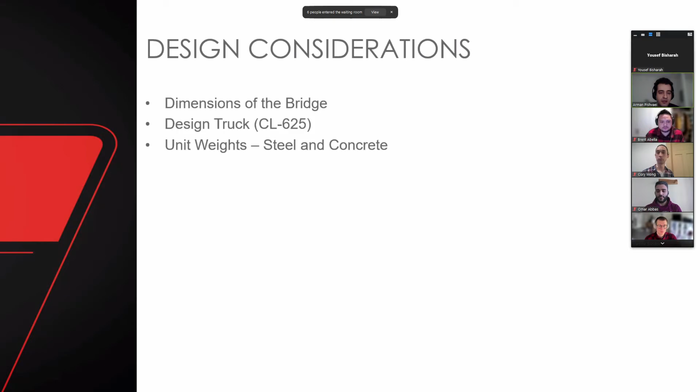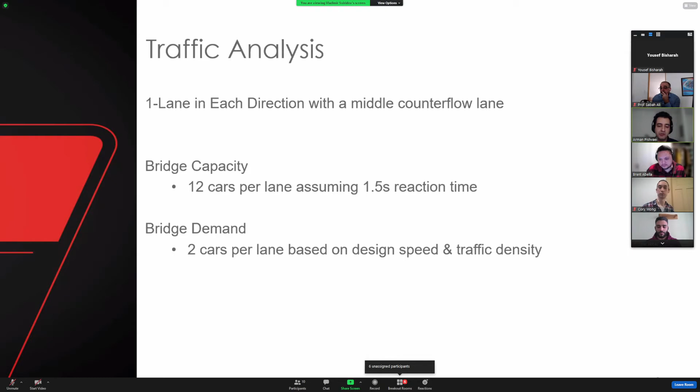Thank you, Arman. So after we've done our load calculations that we submitted, we analyzed both the superstructure and the substructure, and we figured that the most susceptible to failure is going to be the high tensile cables, specifically cables 1, 20, 21, 40, 41, 60, 61, and 80. These cables are the longest, with the furthest extents from the piers. The reason is that they have the least vertical force contribution to resist the vertical dead load and live load of the weight, which is minimal. That's why they're probably the most susceptible to failure.

To talk about the environmental analysis, I'll pass it over to Tuan. Thank you, Brent. We considered reducing cost and energy usage using sustainable materials for our concrete and steel bridge, such as recycled aggregate or recycled concrete, as well as recycled steel. Recycled steel would have comparable performance. Also in concrete, cement can be combined with fly ash and slag, which are byproducts from steel production, to help reduce the environmental impact or requirement for cement.

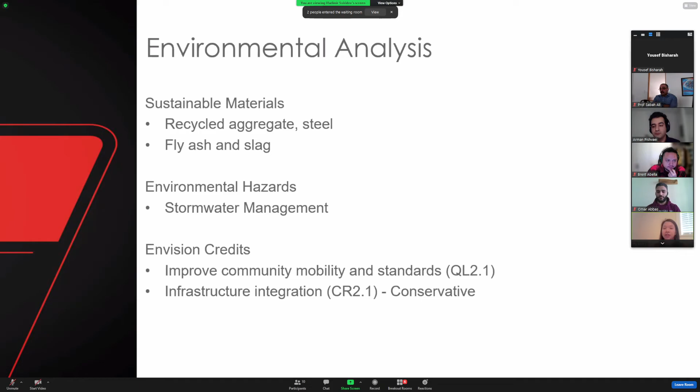Okay, thank you. This concludes our presentation. We talked about the civil 3D models, the AutoCAD model, the load calculations, as well as our environmental analysis. And I open the floor for any questions.

Thank you. Yes, thank you for, you guys concluded with a bang. It's great. So yeah, we'll have a couple minutes for questions from the judges. Dr. So I'll just stop the share. If you want to go ahead this time, Dr.

Yeah, I can ask a few questions, and I wish I would not take more time. So first of all, I like the report. I like the drawing. I like the aesthetic of the bridge, even though you just violate one of the conditions of the height, but it looks nice. I also like the compatibility between the aesthetics and structure design. But I also very like the environmental explanation. You covered very good points, and I liked it. I have questions about the traffic analysis.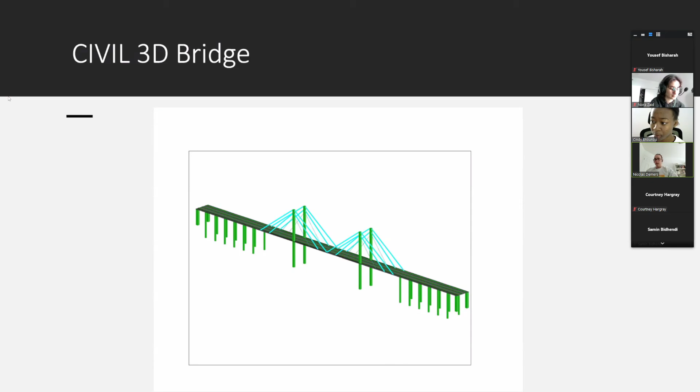This is the 3D model of our bridge. It is a mix of a bridge with cable and some with pillars. The pillars that support the cables are in the deepest part of the river, and the series of smaller pillars are on the parts that are less deep, so it will be the better model to not disturb the naval traffic.

The bridge is situated in the River Ottawa between the small island of Clarence and Thurso, and the design that we will follow later takes into account the length and some aesthetic reasons.

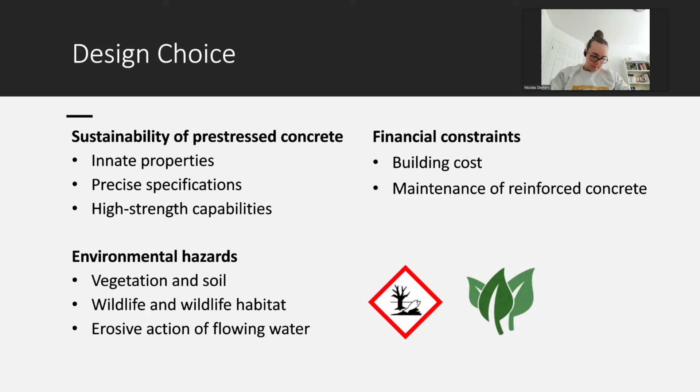For the sustainability of the pre-stressed concrete, it can be observed through its innate properties: strength, durability, and resilience to extreme weather, and it increases the performance over its whole life cycle. The precise specification and the high strength capabilities minimize the number of columns and save material, and it also reduces waste.

For the environment, bridges can disrupt wildlife habitat, vegetation, and soil, and the erosive action of flowing water. High rates of discharge and movement of ice can cause flooding and losses in property. The cycling and pedestrian lane in both directions can encourage users to opt for environmentally friendly means of transportation.

For the financial constraint, we have to take into consideration the building costs and the maintenance of the concrete, and the combination of cable-stayed and bent column system reduces costs and provides more stability during flooding in case the backfill gets washed out, and it's easy to rebuild the ramps.

Here's a profile or elevation view of our bridge. It's considered a long span bridge with a length exceeding 350 meters as per the Canadian Highway Bridge Design Code. It's made up of a concrete deck with steel girders and a cable-stayed middle section with piers on the exterior, longitudinal direction to allow for boat clearance in both the lateral and vertical directions.

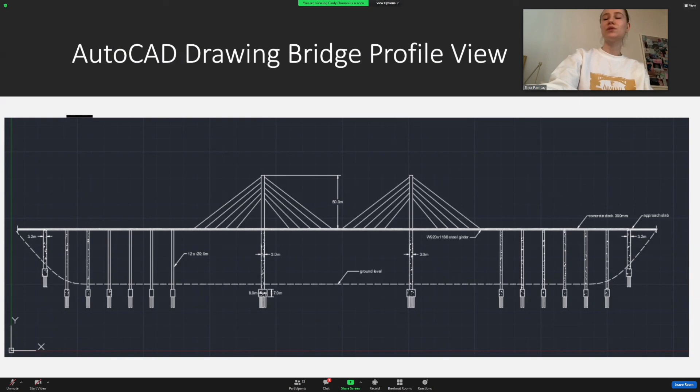There are only girders running along the portion of the superstructure with the supporting piers on the exterior, where the cables are no longer extended. We chose a deep foundation with piles as we need sufficient strength for this very large structure, and to ensure our foundation won't fail under any potential weak soil conditions. Our deck is 300 millimeters deep with an approach section on both sides to allow for entry and exit of traffic flow.

Getting into some more specifics, we chose a 14-meter height above the water level to account for high water fluctuation, as well as the clearance for boats.

The deck width was determined based on traffic analysis, which Ryan will get into shortly. We have 20 cables per tower, the tower height is 50 meters, and for the girder size we have 7 steel girders spanning the transverse direction of size W920 by 1,188. This is one of the largest girders of standard size in the steel handbook, with the largest web thickness I could find, to try and avoid potential buckling failure.

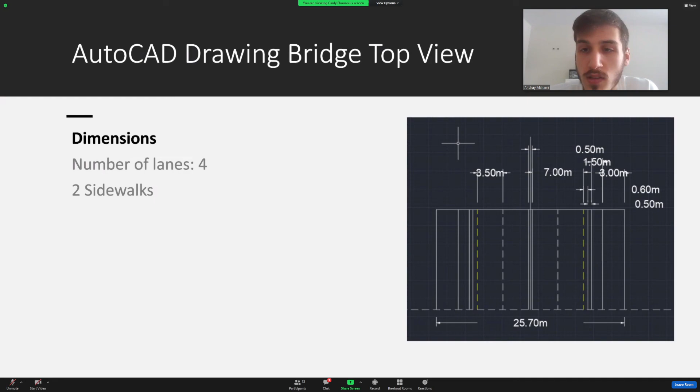Here's a section of the top or plan view of the bridge, where you can see it consists of 2 lanes on each side, each 3.5 meters. The opposite sets of lanes are separated by parapets as the speed of traffic is high. On the right of each set of lanes, there is a 1.5 meter sidewalk or bicycle lane, and then a drainage system and a space for the pillars and cables to be connected. The total width of the bridge is about 26 meters. Now Ryan will talk about the detailed traffic analysis.

We conducted a thorough traffic analysis to determine the needs in terms of traffic flow to design the bridge and find key components such as number of lanes, lane width, and level of service. We aimed for a level of service A, the best with free flow speed, and designed for that LOS, but when checking our design using density, it turned out to be level of service B, which is still good compared to what we settled for.

We determined that 2 lanes of 3.5 meter width in each direction would be sufficient to maintain acceptable traffic conditions, and we determined the free flow speed to be 77.8 km per hour. Furthermore, we included a 0.6 meter right shoulder for each direction.

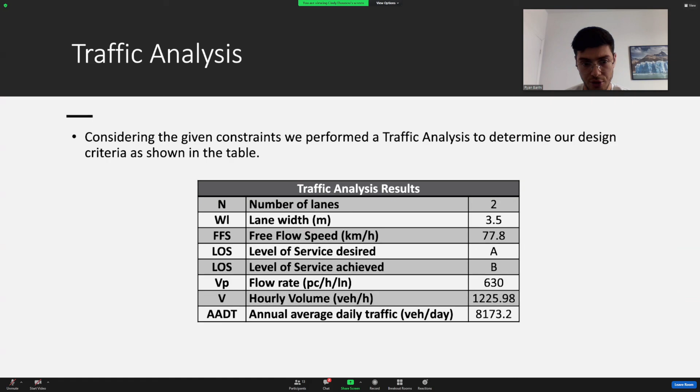Using the traffic analysis formulas, we found the hourly volume to be 1,226 vehicles per hour and the annual average daily traffic to be 8,173 vehicles per day, which is fairly high for this location. So we designed our bridge considering a significant amount of traffic, even being conservative, in order to avoid congestion and keep the free flow speed acceptable.

When conducting a load analysis, we determined a uniform unfactored dead load of 585 kilonewton per meter for the superstructure, composed of the concrete deck and the steel girder.

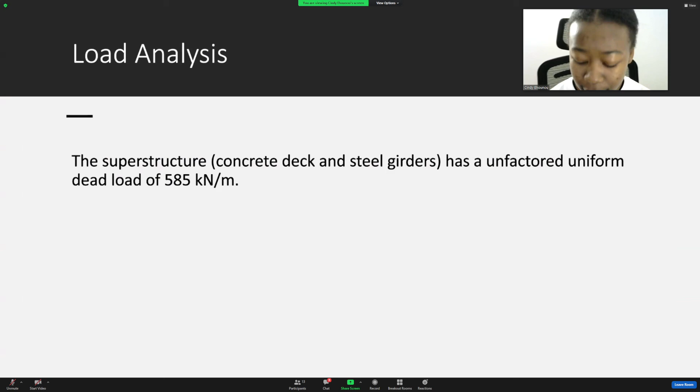In conclusion, the Atlas Bridge, which is a combination of a cable-stay bridge and a bent column system, is located over the Ottawa River. We think this bridge is well suited because it provides a reliable transportation route that is aesthetically pleasing and complements the environment well. Thank you very much.

Okay, great. Judges, do you have any questions for them? Are they civil engineering students? Yes, I think most of us are. What year? Civil and building engineering. Third year. We have a first year too. Okay.

Maybe one quick question: why this type of bridge, like cable-stayed, and not a suspension bridge? Both can be used for long spans. So what was your thought process for that specific type of bridge?

Well, this type of bridge is one of the more stable options. If there's a flood, it will be easier and cheaper to repair than the other type, because the supports are more on the side, and also because it's easier and cheaper to build this kind of bridge than a suspended bridge with a longer and more complicated design.

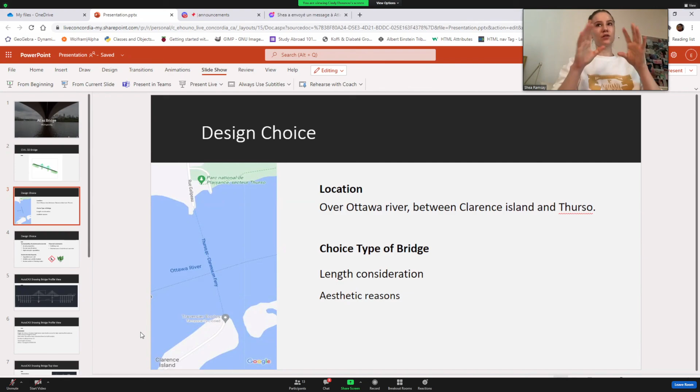And we liked the way it looked too. We also took inspiration from the bridge on Highway 25, which is similar to ours in some sense. The distance was pretty close - the Highway 25 bridge is about 500 meters, and ours was 530, so that's why we used a hybrid. It was inspired by this one; there's a similar design and similar constraints, so we drew inspiration from that location and that already existing bridge.

How did you choose the 14-meter clearance height? We looked on the maps to find the closest bridge on the Ottawa River, which was the Alexandra Bridge, near Ottawa. When I looked it up online, I found a report for the restoration or replacement of the bridge, and on the report there was a plan from one of the design choices, and the height between the water and the bridge was 14 meters. That's why we chose this height.

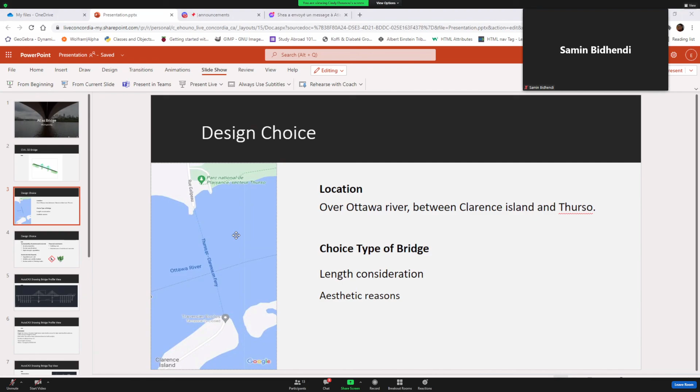Okay. I didn't see really any load analysis in your report - was that due to lack of time, or did I miss it? Yeah, we only determined the dead load quickly, but because of lack of time we didn't go in depth with live load analysis. We were really rushing at the end. We mostly focused on the design of the actual bridge in 3D and AutoCAD, so we didn't have much time left for the entire load analysis.

Judges, are you done with your questions? Yeah. Okay, then I'll take you to the judging.